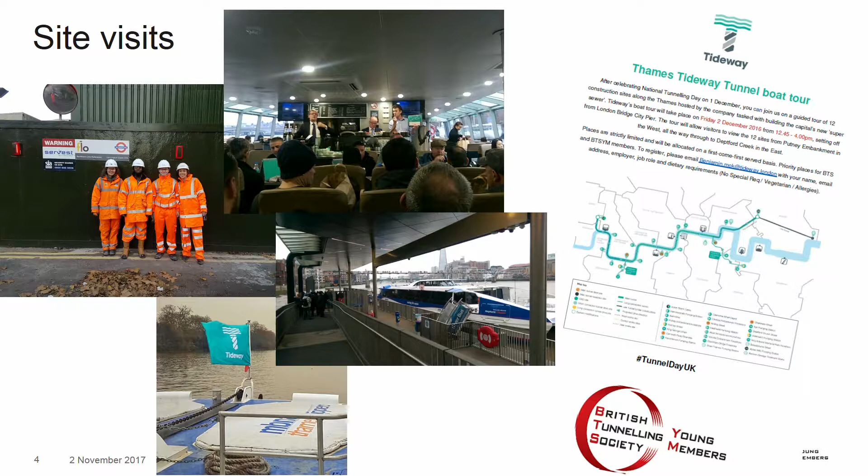And then in terms of site visits, we had 2 towards the end of last year, which was to the Northern Line extension, and we had the Tideway boat tour, so those were run as part of the National Tunnelling Day last year.

We also held our conference in March 2017, and it was popular as ever. We had close to 100 people attending, about 15 presentations by young engineers and professionals in the industry. We will be holding a conference again next year, and we're very keen to continue that run of giving young people within the industry the opportunity to talk about their projects and the work that they're doing with a like-minded group of people.

Schools and universities, one of our other subgroups, it's been a very busy year for them. We've completed the teachers pack and trialled it at 2 schools, so we did 2 lots of 12-week courses at the Oasis South Bank Academy. We ran our teachers pack, which is 5 lessons, as well as organising visits to the ICE and out to site visits as well.

That went down really well, and as a result, the pack's going to be available from next week on the BTS website, open to download from anyone that's interested. And the ICE are also currently developing their website, and there's going to be a new link to our teachers pack along with other resources that you can use for going out to schools and universities.

We also ran a TBM naming competition at the same school as part of National Tunnelling Day last year. That was part of a UKPN project in London, and the class also got to go out and see the TBM before it was launched.

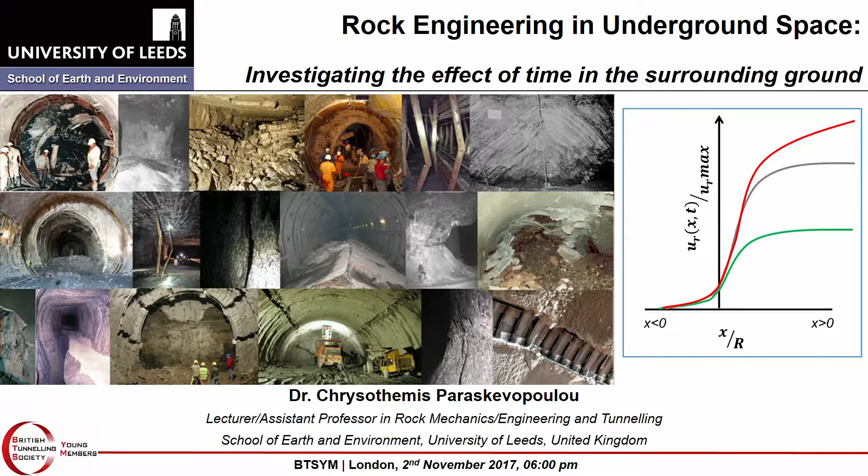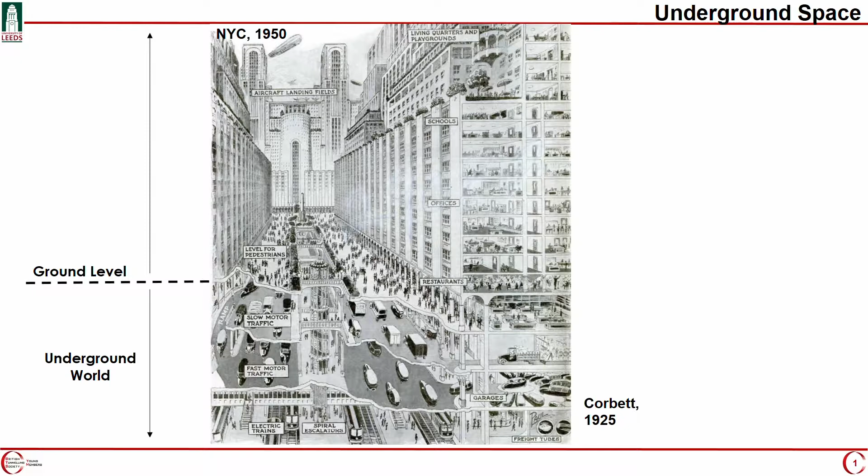When I give lectures and try to introduce the underground space, I really like using this sketch. It is a sketch by an architect, Corbett, in 1925, and he drew how New York City would look like in the 50s. You can see he's not that wrong if you look at the underground world and the above ground world.

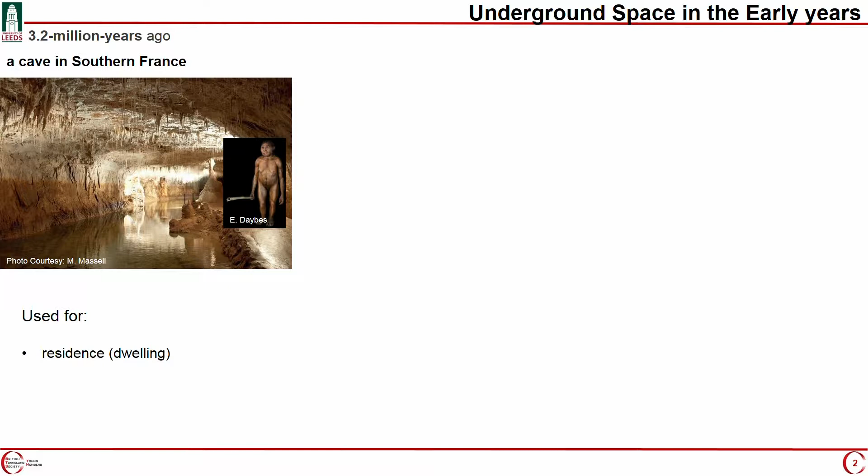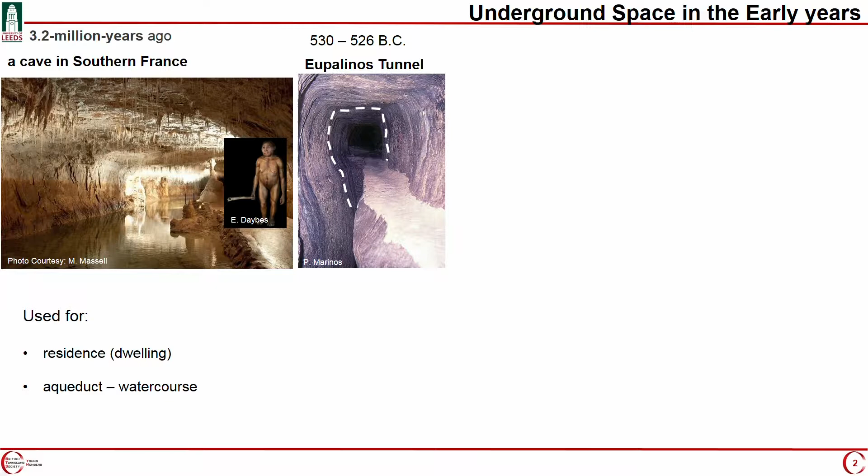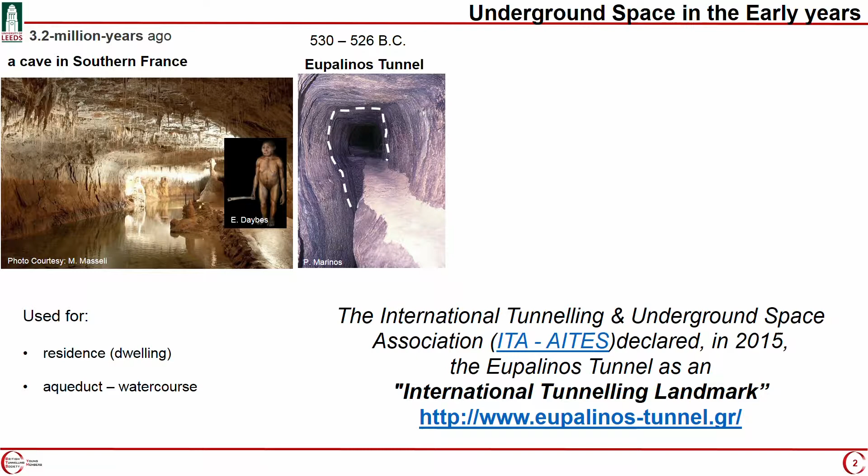Underground space has been used by human beings from the early years, almost 3.2 million years ago, where human beings used caves for their shelters. Here's another example of different usages of underground space worldwide. You can see this tunnel was used for a water course, the Eupalinos tunnel, which was recently declared by the ITA as the International Tunnelling Landmark, and it is one of the first reported tunnels in human history.

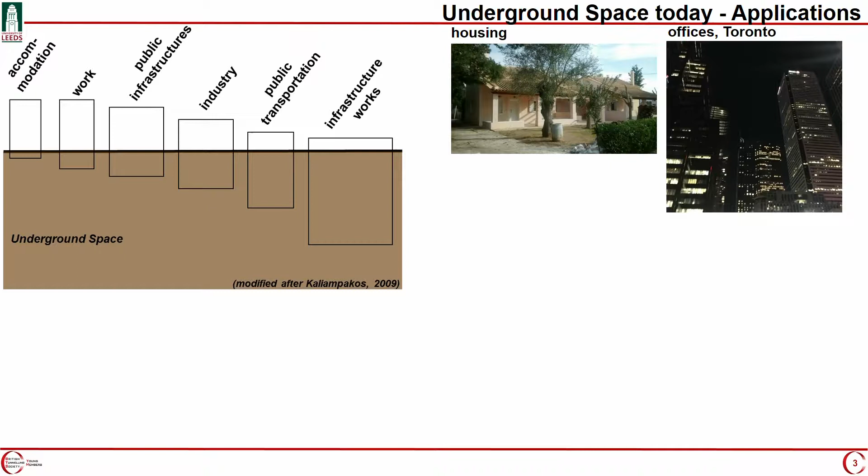Also, people used, even from 500 BC, underground space for creating rooms and spaces for water supply and storage. Here are examples of how we use underground space today - a little bit in housing, for offices to store files or other things. This is why these days the sky is not the limit, and we cannot build skyscrapers forever.

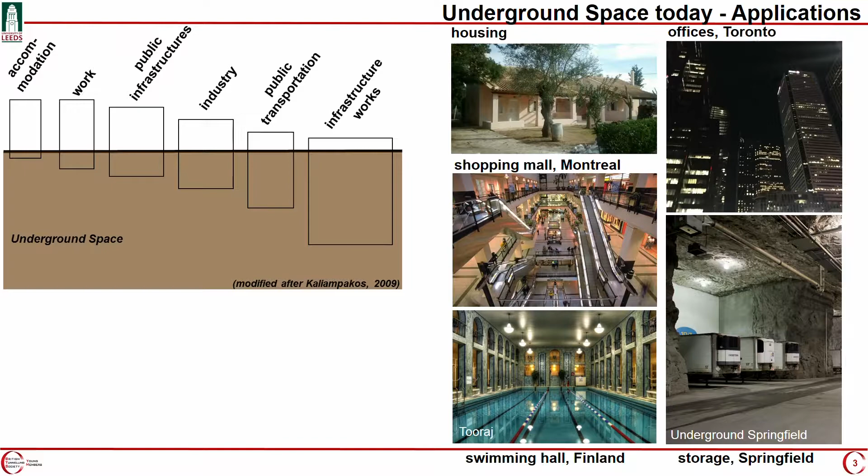We also use underground space for industry and public infrastructures, public transportation and infrastructure works. Here is why we do that and why we should use the underground space.

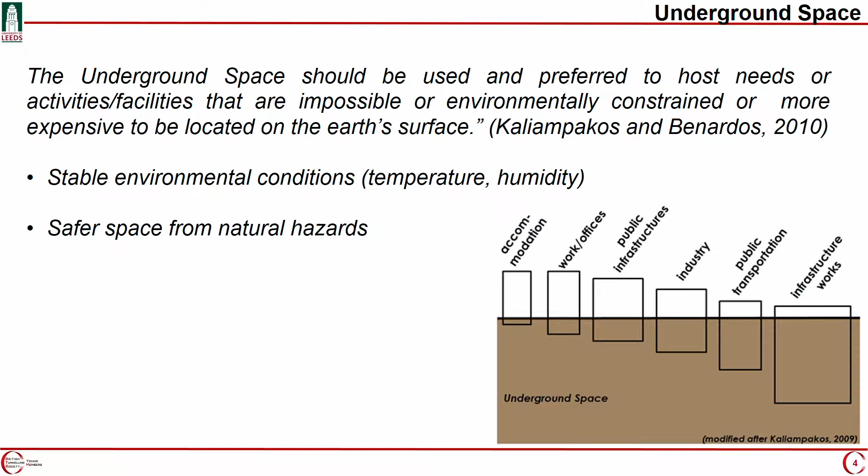We should use underground space and prefer it to host needs or activities and facilities that are impossible, environmentally constrained, or more expensive to locate on the Earth's surface. We do that for two reasons: underground space provides stable environmental conditions, temperature and humidity, and it's a safer space from natural hazards like earthquakes.

But more specifically, why should we go underground? Because we can use the surface in different ways. This is an example of the Musée du Louvre in Paris, where most of the museum is underground.

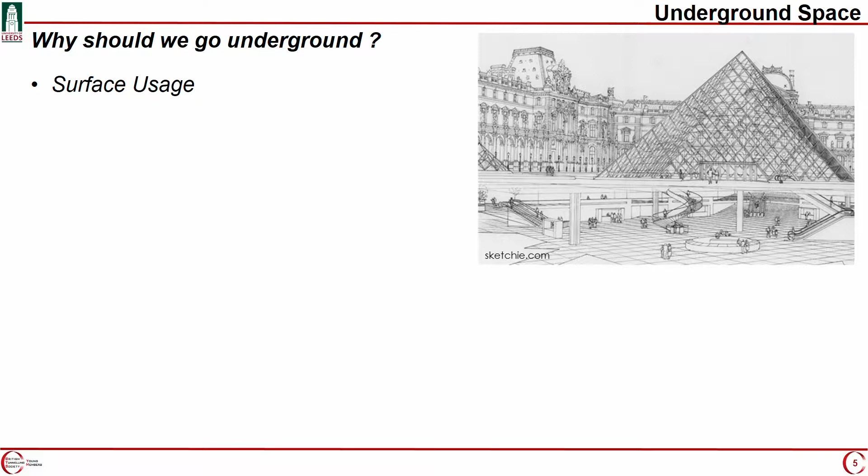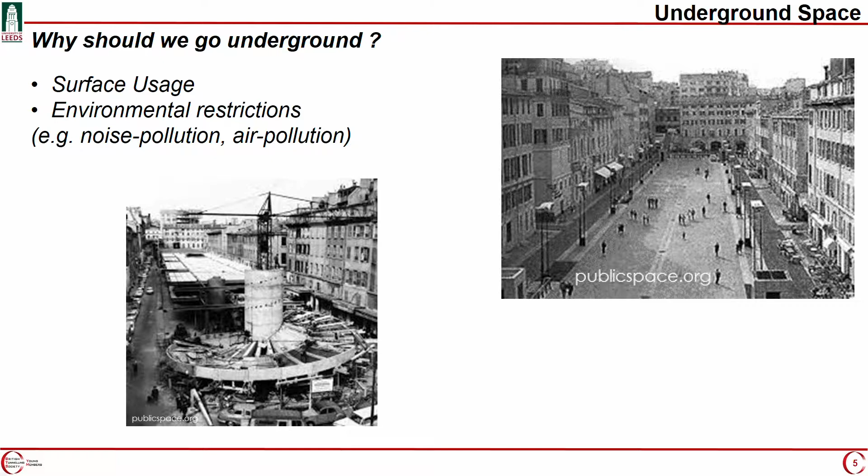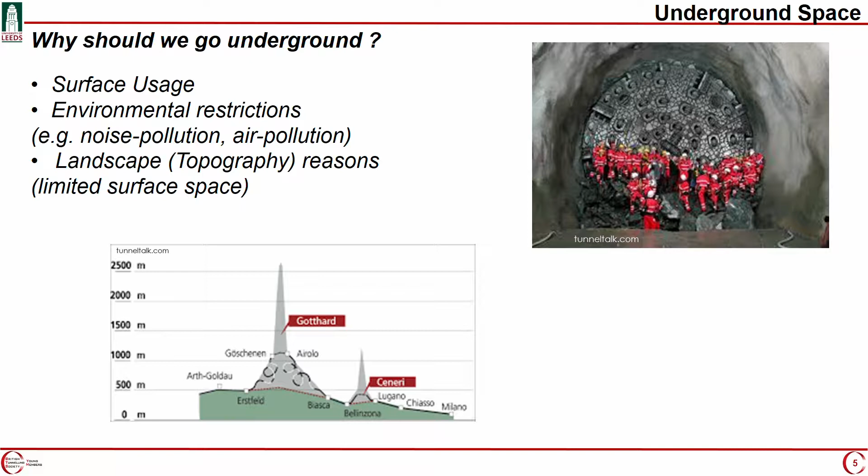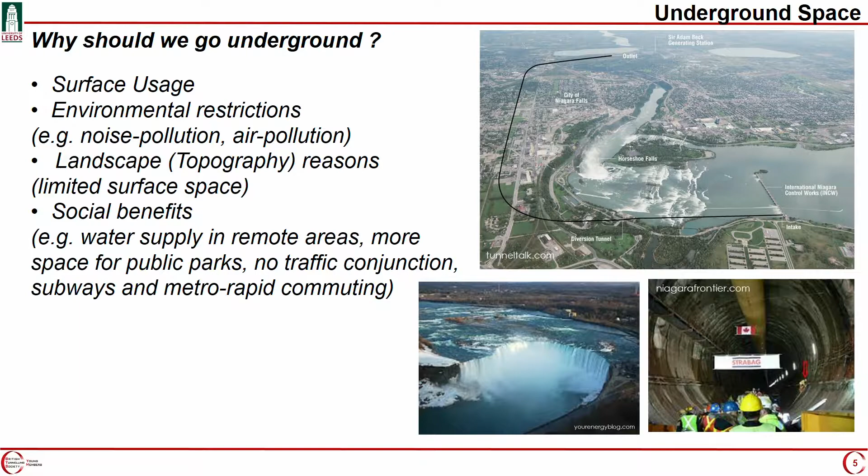Also, we have landscape and topography restrictions. This is the Gotthard Mountain and the base tunnel constructed and opened recently in 2016. And also for social benefits, we use underground space and build tunnels for water supply, public parks, and for limiting traffic congestion, subways and metros, etc.

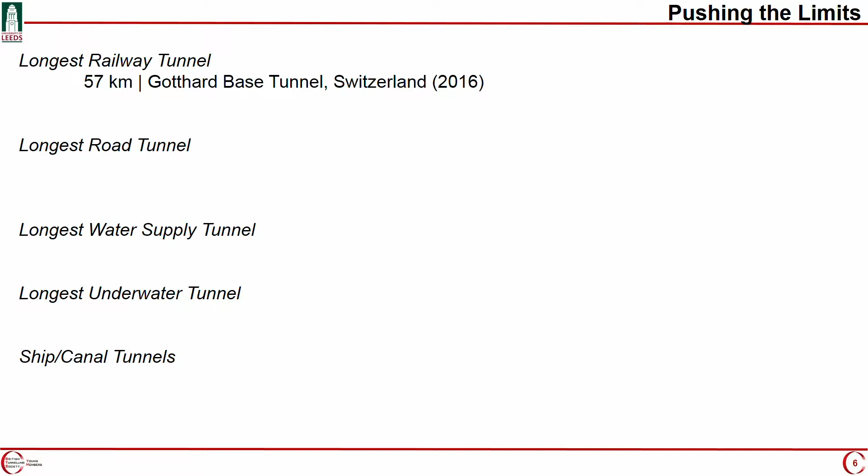But in our industry, we keep pushing the limits. So here are some examples of the longest different types of tunnels. The longest railway tunnel right now is the Gotthard Base Tunnel, 57 kilometers, constructed in Switzerland, opened in 2016. Here is the Gotthard Mountain.

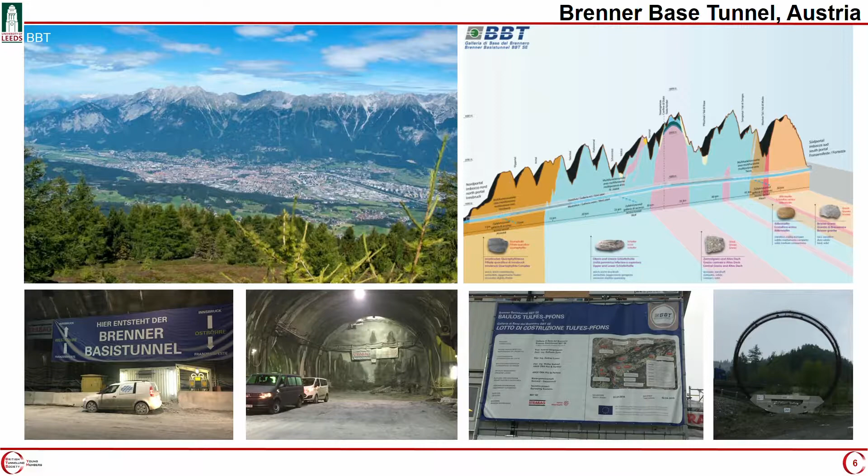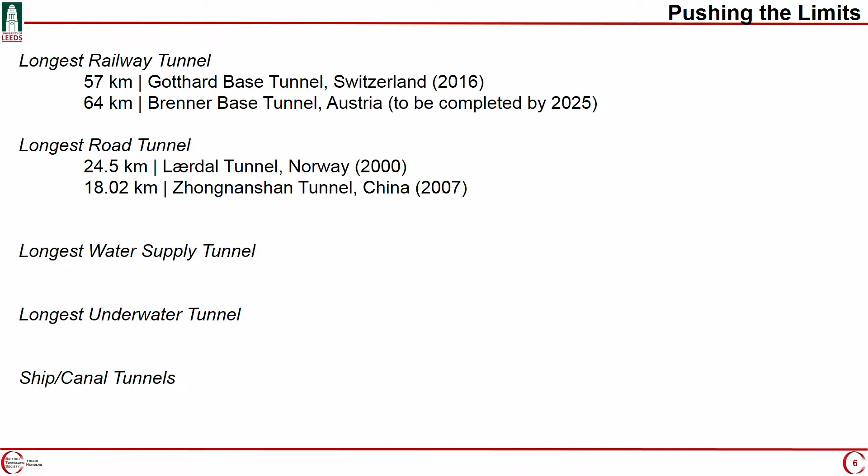The longest road tunnel is the Lærdal Tunnel in Norway, almost 25 kilometers. What's important here is that because the driver cannot keep his attention for more than half an hour or 20 minutes driving in there, they have different colored lights to keep the driver's attention.

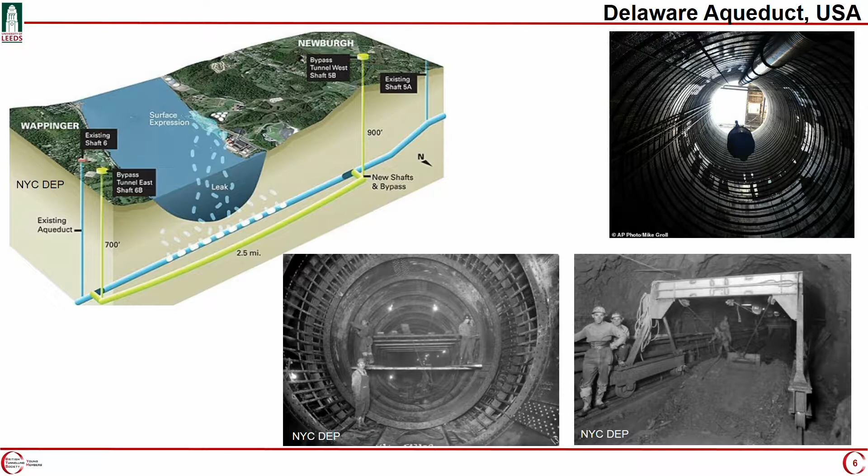The longest water supply tunnel is in the USA, in New York. It's almost 137 kilometers and was constructed in 1945. Because there is a leakage observed on this tunnel, now they're making a bypass.

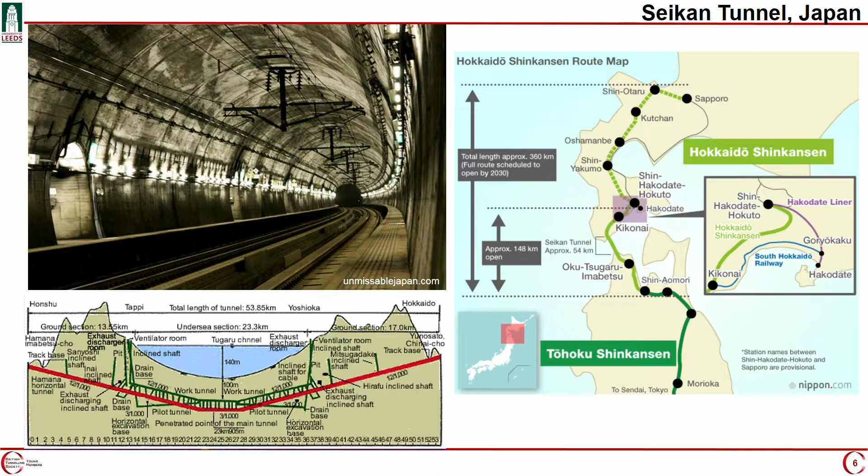And the longest underwater or undersea tunnel is the famous Seikan Tunnel in Japan, connecting the mainland of Japan with the island of Hokkaido. Here are some pictures of the tunnel.

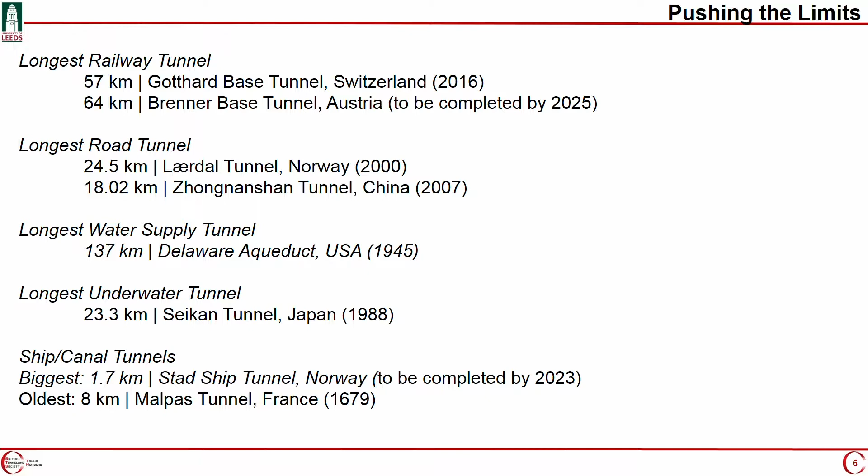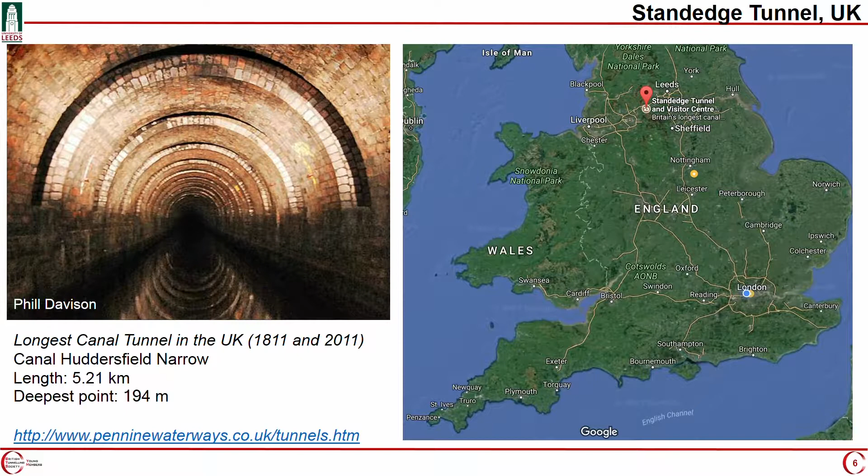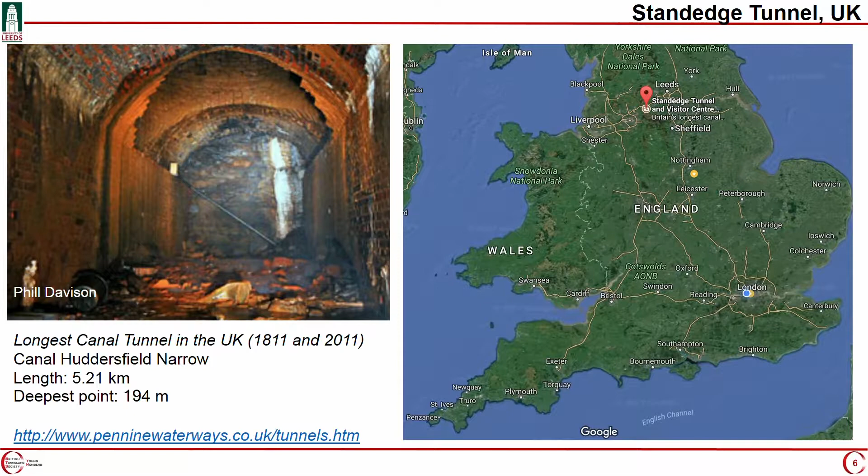But in the UK, as you may know, there are lots of canal tunnels, and the longest one, just for your information, is located between Sheffield and Leeds. It's called Standedge, and the length is almost 5 kilometers. The deepest point within the tunnel is 194 meters. It was constructed and opened in 1811, but was disused and abandoned by the 1940s, and is now reopened since 2011. If you have the chance, it would be nice to visit it.

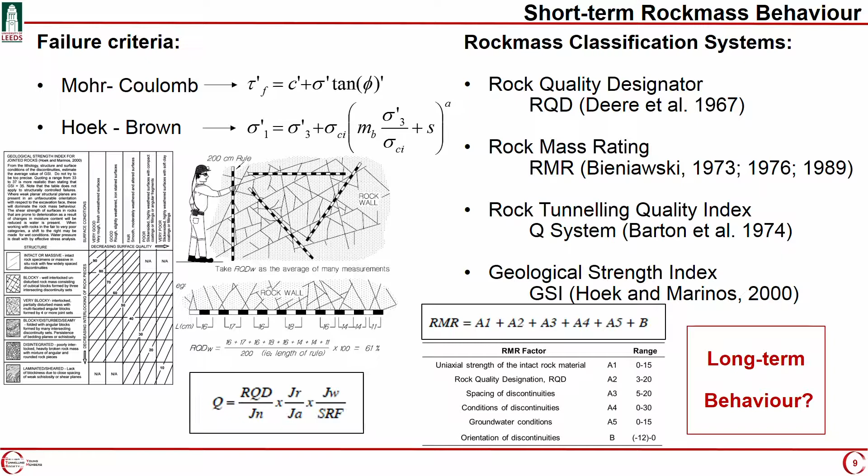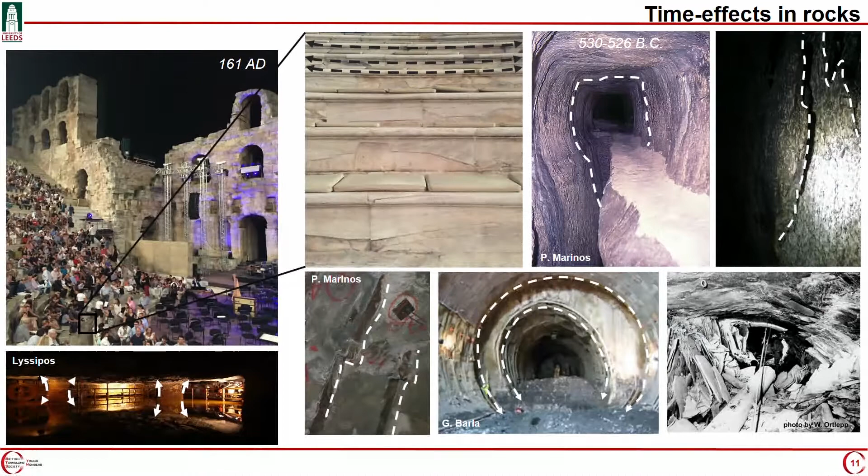So, time effects in rocks. I like using these pictures in my presentations because what I find remarkable is how these marble benches keep standing without failing after so many years.

Again, in the Eupalinos tunnel, it keeps standing, no support, after so many years. Other examples of this time-dependent deformation: you can observe the deformation on pillars on salt mines, or here, this is the famous Saint-Martin-la-Porte tunnel.

Or time can deteriorate the rock mass behavior and lead to sudden failure, mainly rock burst. So I will try to give you an introduction and a few information on time-dependent phenomena. I hope not to get you too tired.

The time-dependent phenomena can be either due to a change in state, stress, strain, or a change of property, Young's modulus, friction, Poisson's ratio, etc. And according to its reversibility, it can be either elastic, inelastic, or irreversible. The physical response can lead to creep, contraction, dilation, relaxation, or degradation.

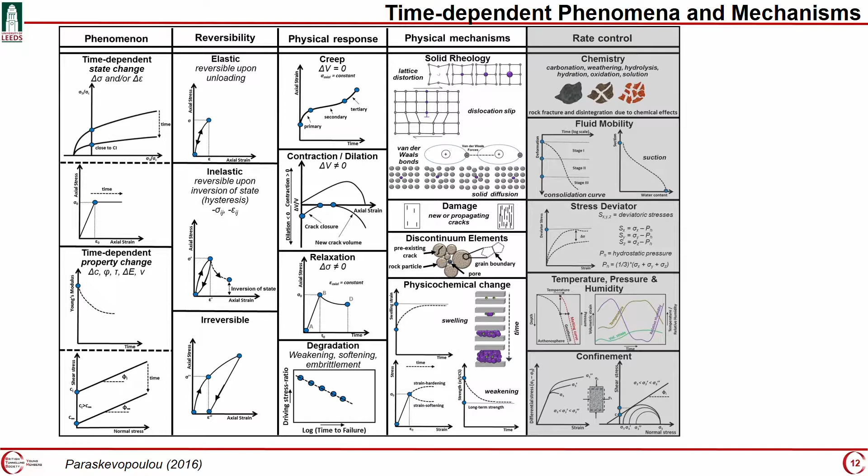The physical mechanism can be due to solid rheology, damage, discontinuum elements, or physical-chemical changes, while the rate can be controlled by chemistry, fluid mobility, stress deviator, temperature, pressure, humidity, as well as confinement.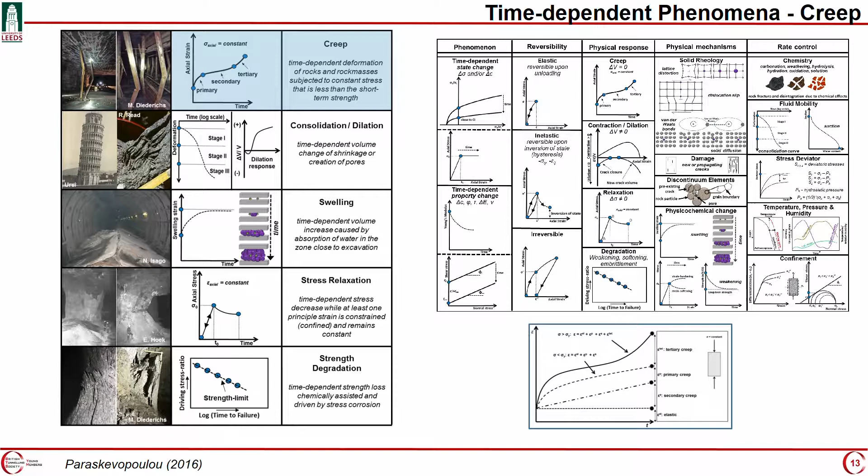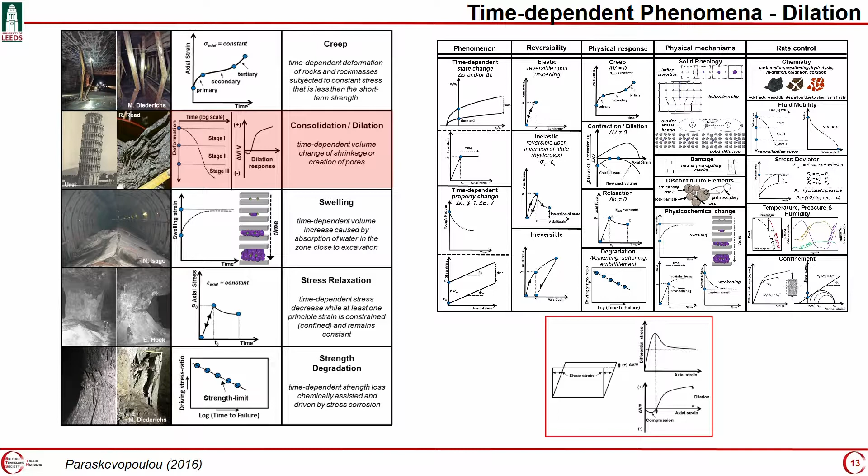Then we could have creep, which is the time-dependent deformation of rocks and rock masses subjected to constant stress that is less than its short-term strength. It can lead to consolidation or dilation, which is the time-dependent volume change of shrinkage or creation of pores. Swelling, which is the time-dependent volume increase caused by the absorption of water in the zone close to excavation.

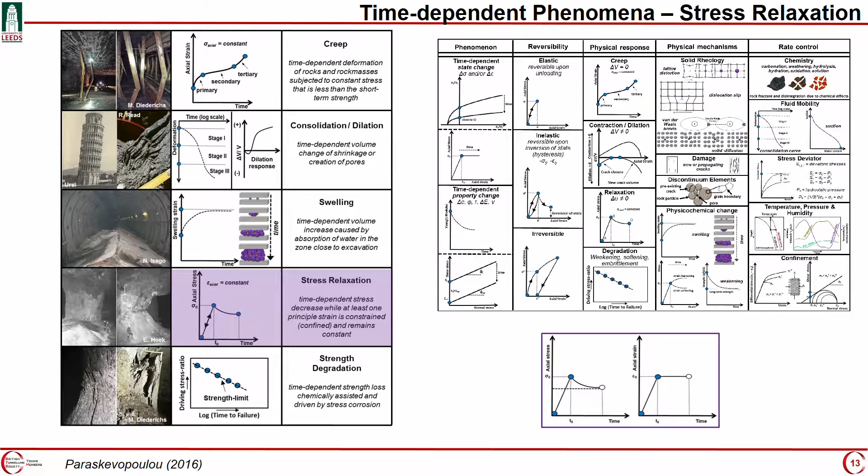Stress relaxation, which is time-dependent stress decrease where at least one of the strains is constrained or confined and remains constant, and strength degradation, which is the time-dependent strength loss that is usually chemically assisted and driven by stress corrosion.

In tunneling, we usually or often deal with squeezing, which is the time-dependent large inward closure of tunnels that can lead to complete shear failure, buckling failure, or shearing and sliding failure. But we can still have swelling or strength degradation, stress relaxation.

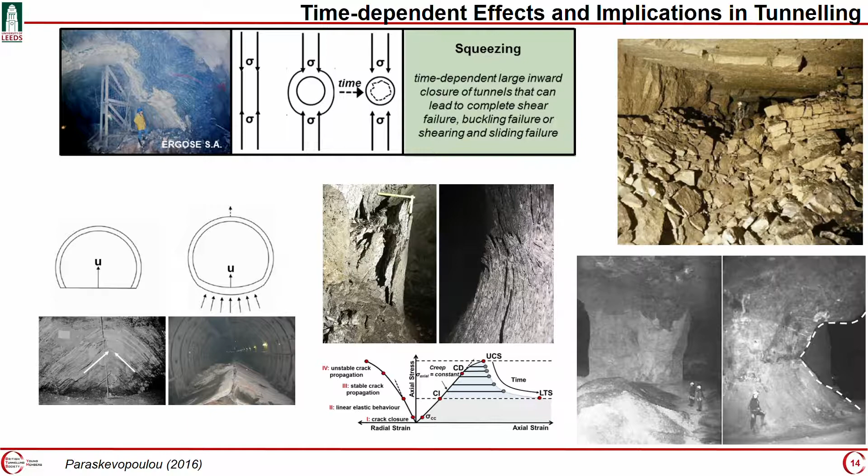What is important here to say is that all of these phenomena and mechanisms can act either simultaneously or individually. So the observed overall tunnel wall displacement can be a function of all of these, a result of all of these different phenomena.

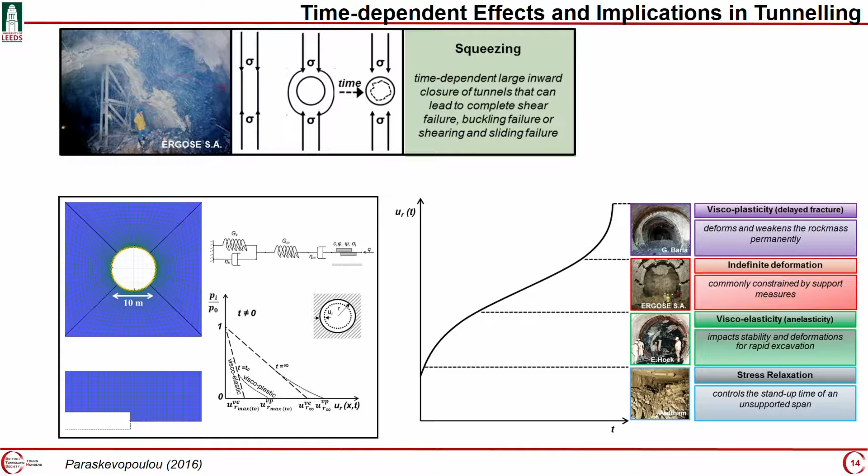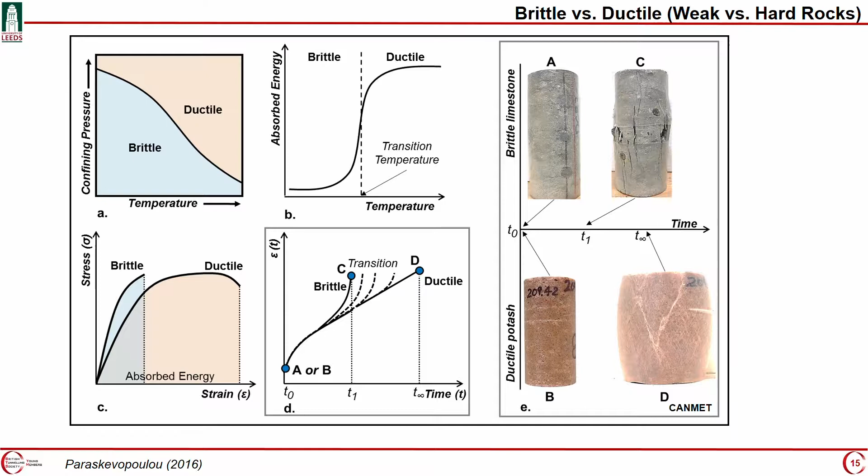Depending on the confining pressure and the temperature at which a material has been formed, it can behave as either brittle or ductile. This is important when we're dealing with time dependency, because potash, for example, with time can keep deforming. However, a more brittle material, for example limestone, will fail in a sudden manner.

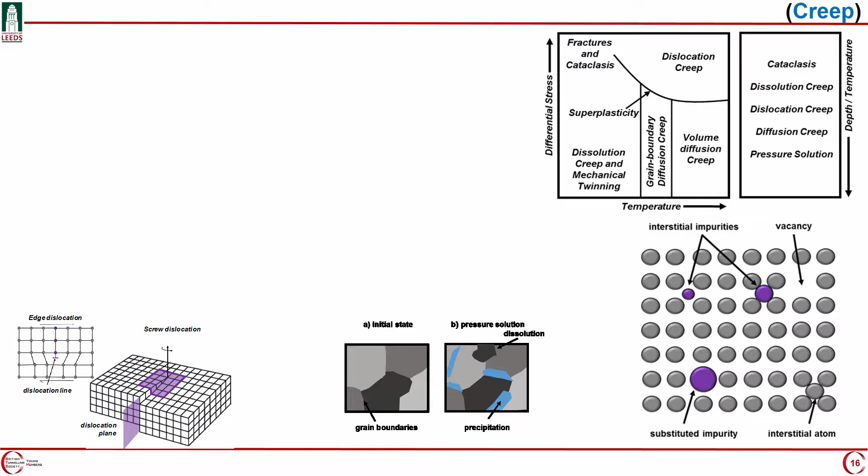Not always are all three stages distinct though. At the beginning we have the elastic response, and then as the load or stress is kept constant, we have increased deformation, displacement or strain. So we have the primary stage of creep, and then the rate of deformation changes and becomes constant - we have the secondary stage of creep - and then at some point we have the accelerating, tertiary creep where failure might occur.

All of these time-dependent phenomena can be simulated with time-dependent models. Usually we use empirical formulations, basically formulations based on experimental data and curve fitting, and general theories that are mainly based on the overstress theory of Perzyna, which other researchers have expanded and extended. For example, Debernardi has created another constitutive model to describe this time-dependent behavior of specific rock masses.

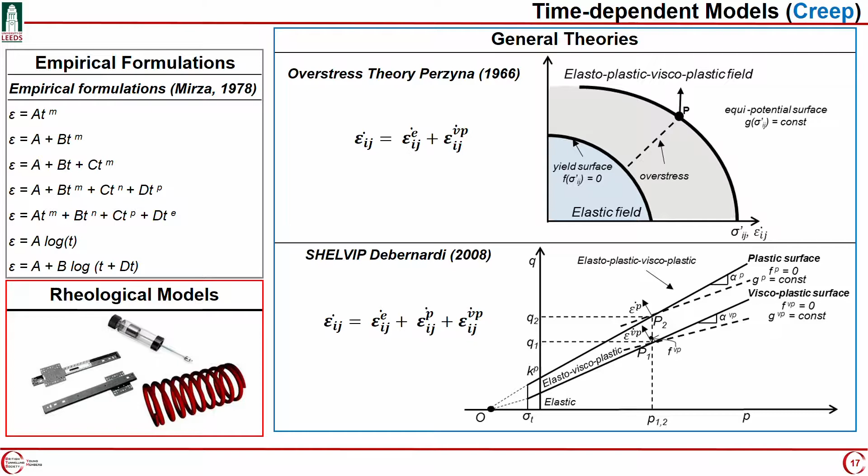And we have rheological models, and I will focus on those. Some of you who do modeling for your job might have seen these things. You might have tried to neglect them, but I will just give you an overview to understand how these things work.

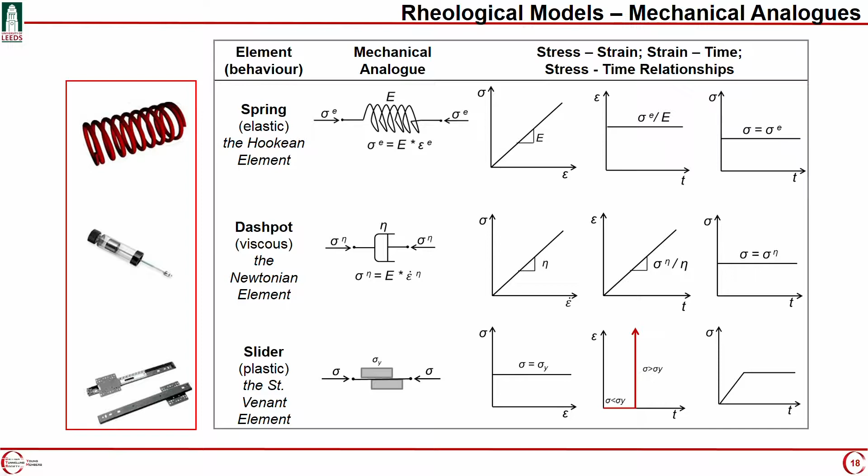Rheological models are basically mechanical analogs that consist of springs to simulate elastic behavior, dashpots to simulate this time dependency, viscous behavior, flow - keep in mind that dashpot means flow, either slow or fast - and sliders, which we use for plastic behavior. So if we arrange these mechanical analogs in different ways, we can simulate different behaviors.

I'm going to focus on viscous models, and I will give you a brief overview of the viscoelastic models that we use for time dependency and mainly in creep.

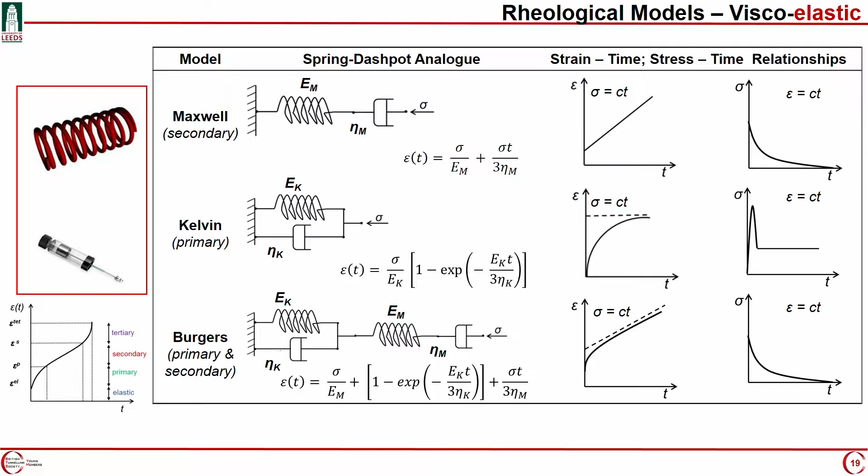If we put the spring and the dashpot together in series, we have the Maxwell model, giving us this part of the curve, the secondary stage. If we put it in parallel, we have the Kelvin model, giving us the primary stage of creep. And if we put those two, Kelvin and Maxwell, in series, we have the Burgers model, which can only simulate the primary and secondary stages of creep.

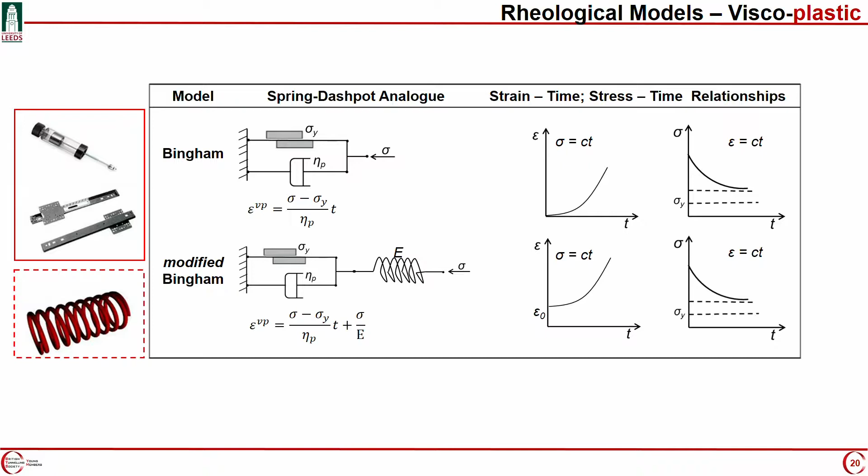When we talk about viscoplastic models, we always need the slider - remember, plastic is a slider. So again, with different arrangements, we can simulate different behaviors.

I will focus on this model that I will be using later in a numerical analysis. I will just briefly give you a description. So we have the CVisc model, which is actually a viscoelastic-plastic model.

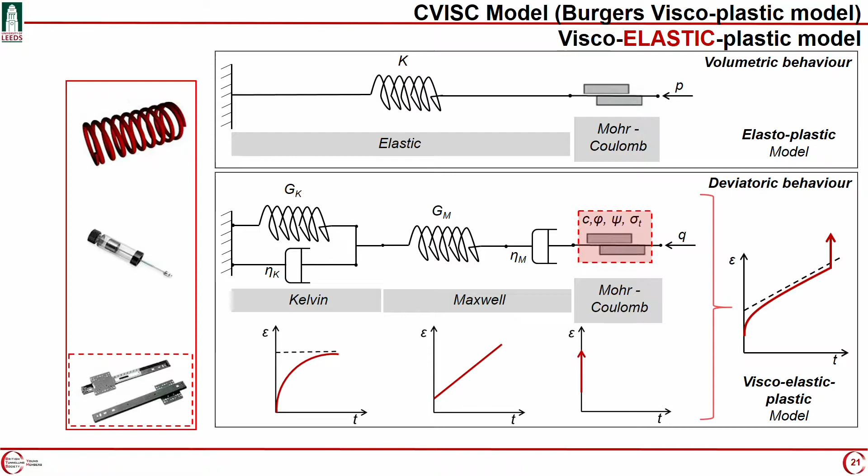And it is a Burgers model, as you may see, with a slider in series to simulate the plastic behavior at the end. And in order to use all these models, we need parameters. And how do we get parameters?

From laboratory testing. So from a UCS baseline testing, and this is a typical stress-strain curve, we get design parameters. So I'll just go through with that very quickly.

At the beginning, when we load the sample, we have the crack closure, the pre-existing cracks closing. As we increase the load, we have the linear elastic behavior until the first crack initiates. And we have this CI threshold, crack initiation threshold.

As we increase the load further, more cracks start to grow and propagate. And as they interact with one another, they have a stable crack propagation until the crack damage threshold, where after this, we have the unstable crack propagation that can lead our sample to failure.

But this is how we can get time-dependent parameters, by changing our boundary conditions. And remember that we need to have a load or a stress that is less than the short-term strength. So we should be on this part of the graph, not closer to the UCS.

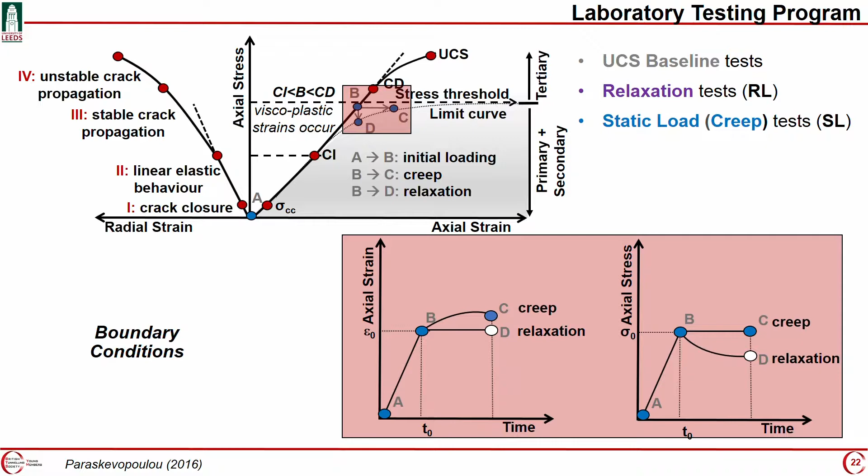And we can have relaxation tests or static load tests. So by either keeping the stress constant, we have creep test, or the deformation constant, we have the relaxation test. So loading until a desirable stress level lower than the short-term strength, and holding the deformation or the strain constant.

Then we can observe the stress, how the stress relaxes. And this is something that we observe usually on tunnel faces as we excavate it, or whenever we create an opening in the underground space, you get stress relaxation. So that's the idea behind it.

And here we have the creep or the static load test. So we load the sample until a certain stress threshold, and then we keep the stress constant, and we see how the strains behave.

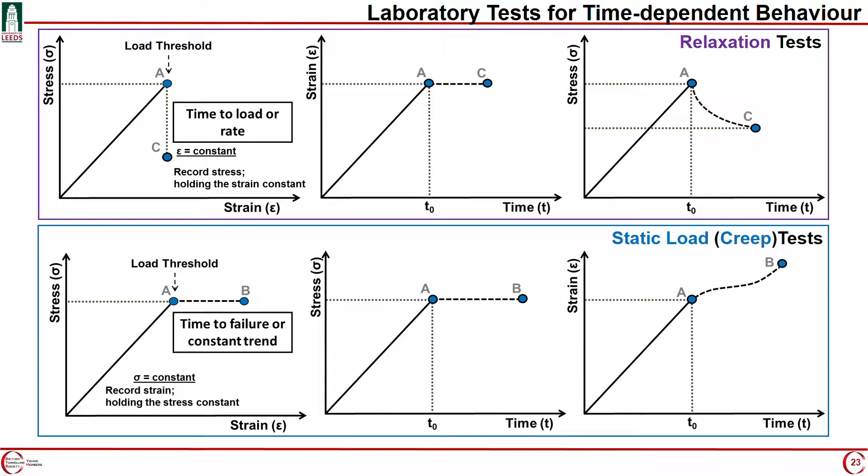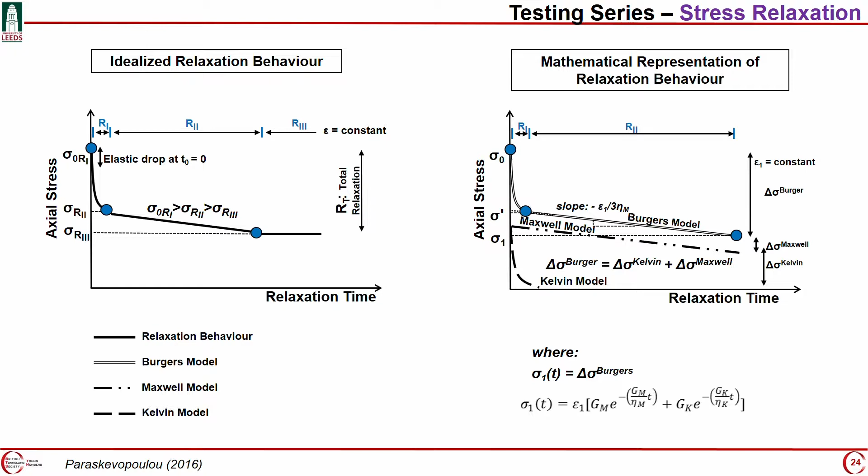In a relaxation behavior, we do have three stages as well, and by fitting our experimental data to an idealized relaxation behavior, you can get the viscoelastic parameters.

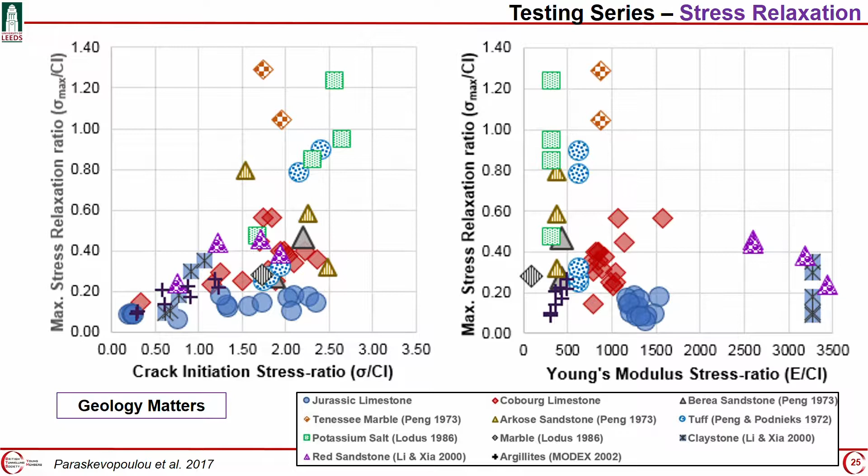I'm just showing you this, but I want to state that there are relaxation tests out there, and there are parameters. So if you dig a little bit in the literature, you can find this easily.

Similar to creep, the only drawback with creep is that you need time to have a creep test, and a relaxation test usually has a faster duration than the creep test. For example, in a brittle material like limestone, you can have a relaxation test within 1 to 2 days. A creep test can last even a year.

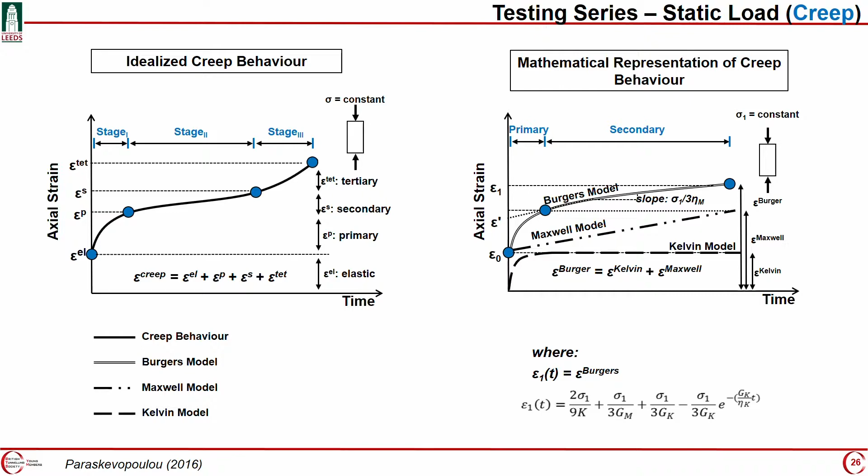That's something else to keep in mind. So here, just one of the results I was doing in my PhD. I was curve fitting. This is real data from a creep test on limestone, and I was curve fitting and finding these parameters.

Something else to keep in mind: creep tests might last longer, but they're good when we're dealing with strength degradation and how the strength decays over time. That can give us an indication of the long-term strength of the rock.

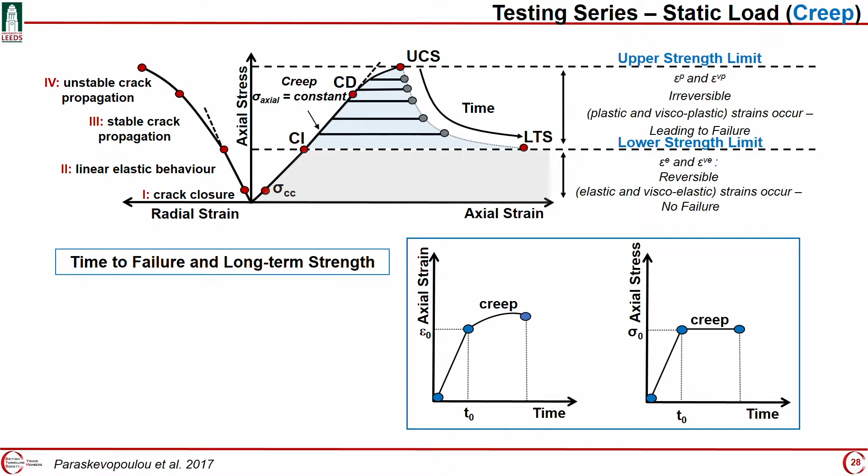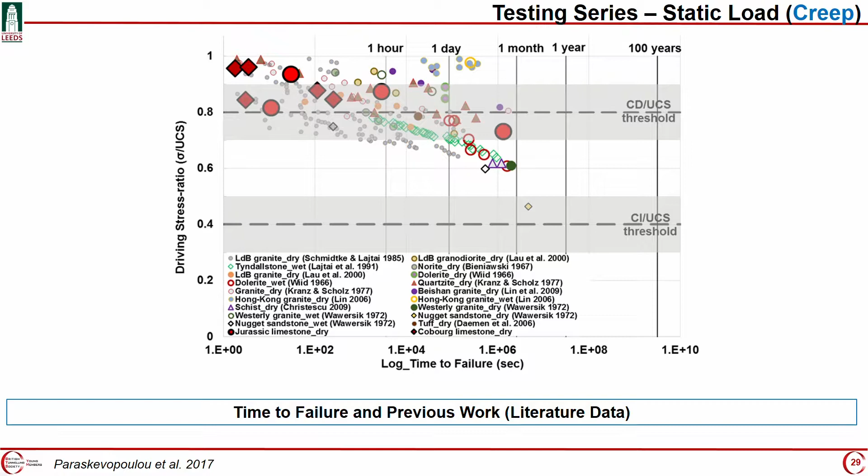So again, this is another data set I put together with many different rock types on long-term strength. For example, we have two different rock types, limestone and granite, and even though granite is usually stronger if it is not weathered than limestone, in the long run, the limestone is stronger than the granite, as you can see here. Think of it as normalized stress versus time to failure.

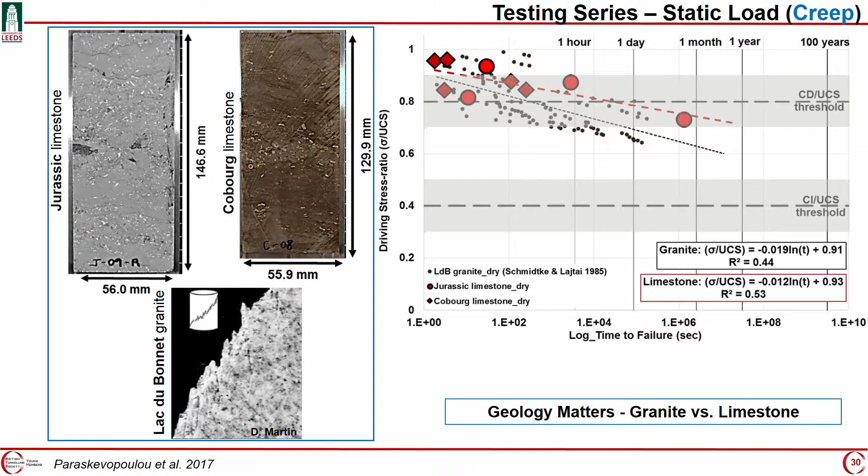And because of the heterogeneity of the granite and the different mineralogy and the different rates that the minerals flow in granite, they can make the granite fail and not be able to sustain as much strength as the limestone, which is more homogeneous. So I'm just trying to trigger your mind when you're dealing with different rock types.

So this is an overview of the long-term strength. We have the driving stress ratio here, time. All these dots, the filled ones, are samples that have failed. The open circles and shapes are samples that haven't failed yet.

So when we're dealing with brittle materials, we expect failure to occur within an hour when we load it in this threshold above crack damage threshold, when we have this unstable crack growth, if you remember, and below CI, where we have the elastic region and crack closure, we are not expecting damage.

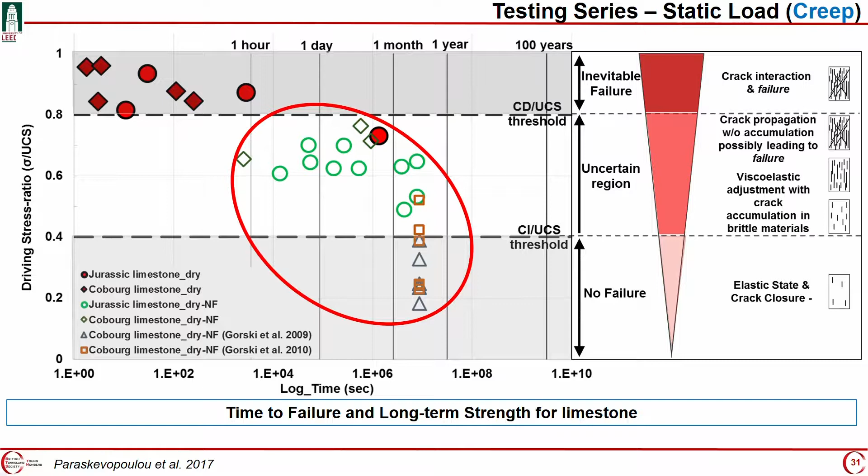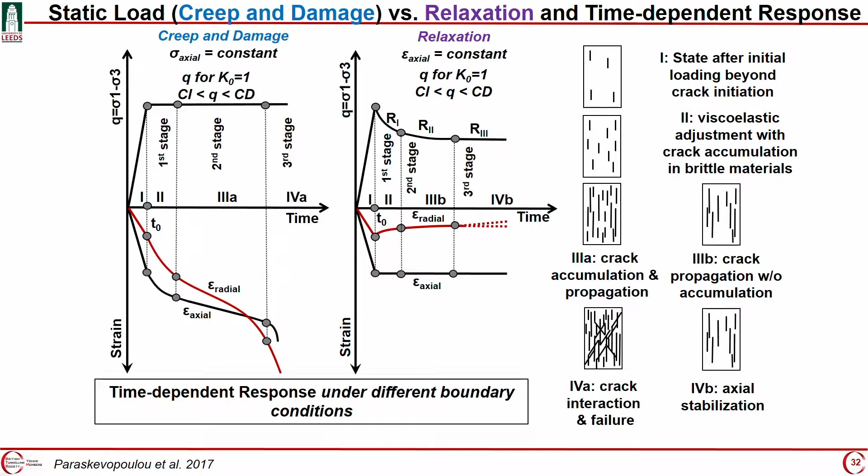All of these points, you should think of them as moving points because they're going to fail later on over time. Just an overview of these two types of time-dependent phenomena: creep and relaxation. They both can be described by three stages, and similar responses can happen depending on the load on the rocks as the load and stresses change over time.

So, we have figured out a way to find our parameters. Now what do we do with these parameters? I'm going to give you an example of a numerical analysis I did using this time-dependent behavior in a tunneling environment. Before I do that, I'd like to say a few words about convergence and the convergence-confinement method and characteristic lines, and how using this method we would approach time-dependent behavior in a tunneling environment.

Convergence is usually defined as the inward tunnel wall displacement, and this can be a function both of the tunnel advancement and the time-dependent behavior. So it's a function of both the location of our face and time.

We use this approach also with the ground reaction curve, which shows the decrease of the internal pressure PI. Most of you might have seen this before. If we assume that this is a tunnel and this is our face, our internal pressure in front of the face equals the stress, the in-situ stresses, correct? And then as we progress in the tunnel, this PI starts to decrease.

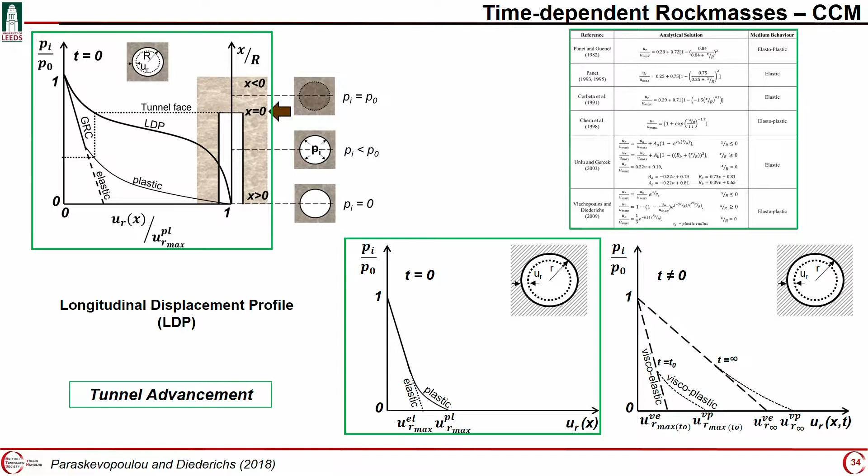There are many formulations and analytical solutions for these LDPs, or how to calculate LDPs, depending on the material behavior, whether it's elastic or elastoplastic. But they neglect to account for time.

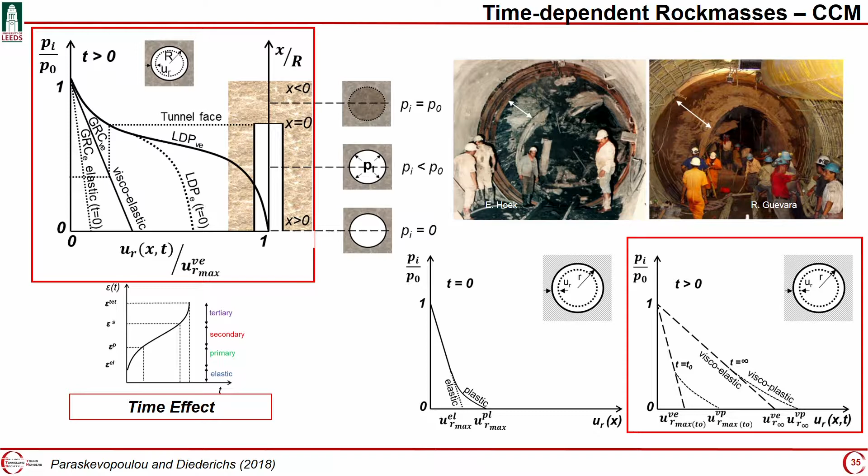So if you don't account for time, you might end up with these unfortunate situations. This is from the Yacambu tunnel, and you can see the remaining parts of the TBM. It had to be abandoned. In this case, they underestimated the total displacement, so they got their TBM trapped.

There are, however, analytical solutions for these time-dependent models that I was explaining to you before in a tunneling environment, referring to circular tunnels, the simplest geometry. However, they don't account for tunnel advancement. So either you have one or the other.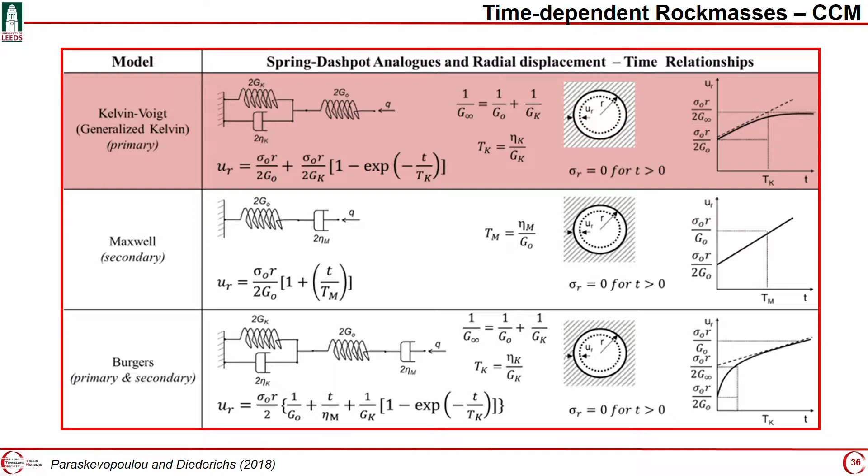I will be focusing on the Kelvin-Voigt, the primary stage of creep, where after a while the displacement or the strains stabilize and reach an asymptote.

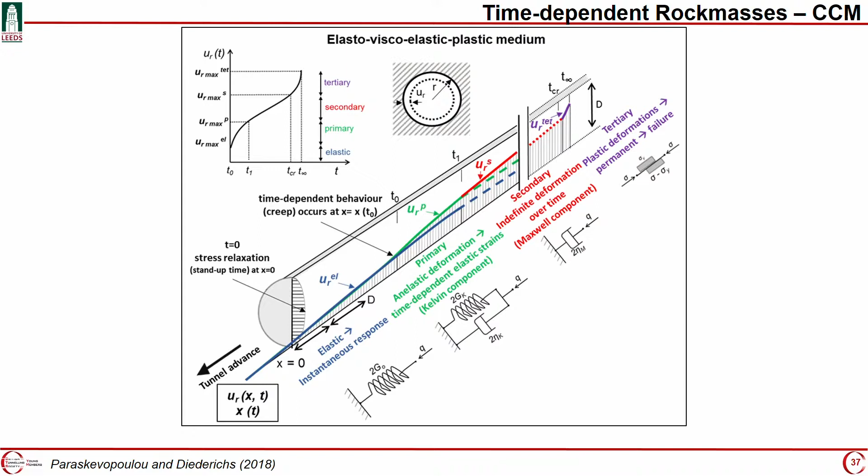I put this figure together so I can put all this information together, but let's take a step backwards. Imagine that this is our tunnel, and our material, our rock mass around it, is elastic. As we know, it will reach the maximum tunnel wall displacement after 2, 3, 5 diameters away from the face, depending on the material, right?

But if this is not the case, what if we have time-dependent behavior or potential? So even this primary stage may need more time for our total displacement to take place. This means we need more diameters away from the face, maybe 5, more than 5, 8.

But what if they don't stabilize? What if the rate changes? Then we have the secondary stage of creep here, then we have the Maxwell component in our model, right? And if they keep going, we are okay. But if they keep going with a constant rate, we have the secondary stage of creep.

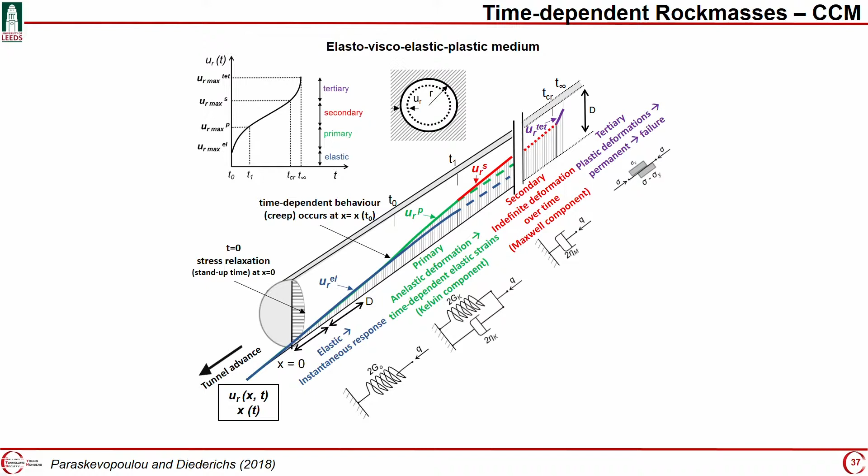But if there is one of these at its critical time, there is another accelerating stage where failure will occur. Then all of this medium would behave as elasto-viscoplastic. But in the analysis I'll be showing you, I have neglected this tertiary stage of creep. I am only showing you the elasto-viscoelastic medium, so no failure.

Just keep going, and imagine this like a tunnel that will keep deforming until closure takes place.

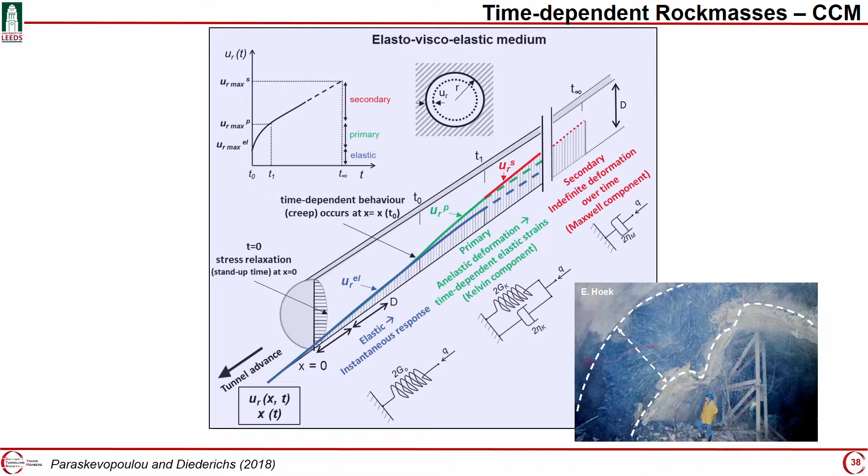So I will give you an example of a numerical analysis, a parametric analysis I did with FLAC, Itasca software. I analyzed two cases, drill and blast. You can see here the jumbo and the TBM. The only difference between those two is the excavation, the length of the tunnel advancement, since my only separation was between those two methods. Drill and blast, 3 meters usually, and 1 meter for TBM.

I created this rock mass material as a viscoelastic material. I increased the cohesion and the tension so it became elastic, and I used that CVisc model I showed you before. I analyzed two sets of parameters, two different sets of viscoelastic parameters.

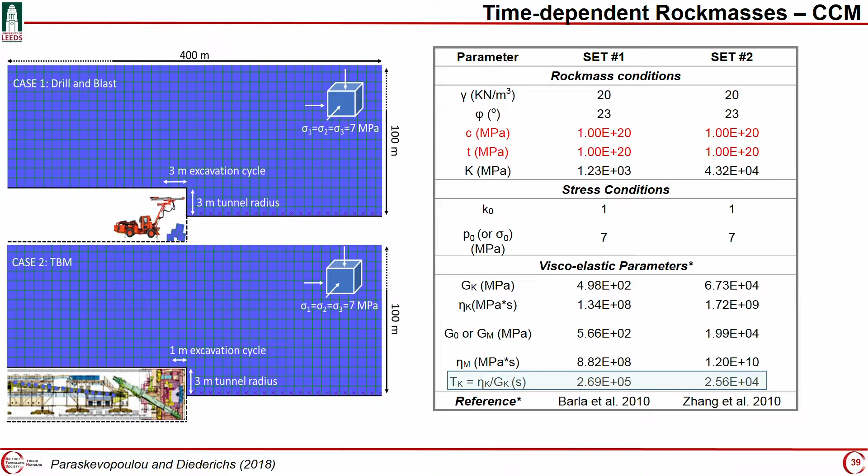The main difference was that this set of parameters had a difference of an order of magnitude in this parameter, called the retardation time. I will show you through the results what this does. But before I started my analysis, I wanted to compare my analytical solutions with numerical results.

So I used the elastic and the Hoek-Brown and Duncan-Fama elastic solutions, made it elastic, and the Kelvin-Voigt numerically, and the Kelvin-Voigt of Panet's equation. The results are pretty good. Here is displacement, and this is distance from the face. All of these views are closer views of these rectangles. You will see many figures like that from now on. These are the LDPs we were talking about before.

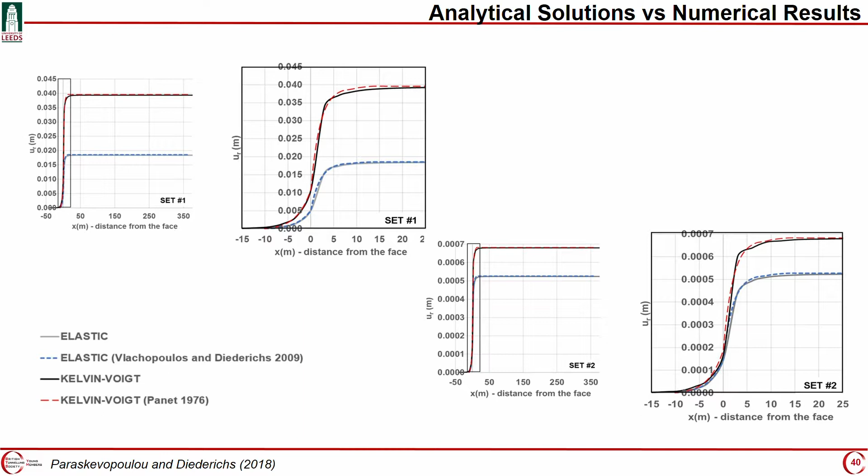So for a drill and blast case, up we have one set of parameters, down we have the other set of parameters. Again, closer views, and all of our results are normalized now, so we will have a reference.

So my boundaries are the elastic limit and the Kelvin-Voigt. This is an LDP assuming that I excavate the tunnel at once, and then I let the creep do its own thing. I didn't take into consideration the tunnel advancement, like how much I progress every 3 or 1 meter. The colorful lines here have encountered the duration of this tunnel advancement.

They refer to numbers 2 to 8, and they refer to hours. So this is if my whole tunnel excavation and support, this tunnel cycle, the duration was 2 hours, 4 hours, 6 hours, 8 hours.

The two sets of parameters with this retardation parameter, one order of difference, it can be seen here. So what this tells us is that the lower the retardation time, or this ratio of parameters, the sooner it converges to our total deformation or displacement, the tunnel wall displacement, than the other set of parameters.

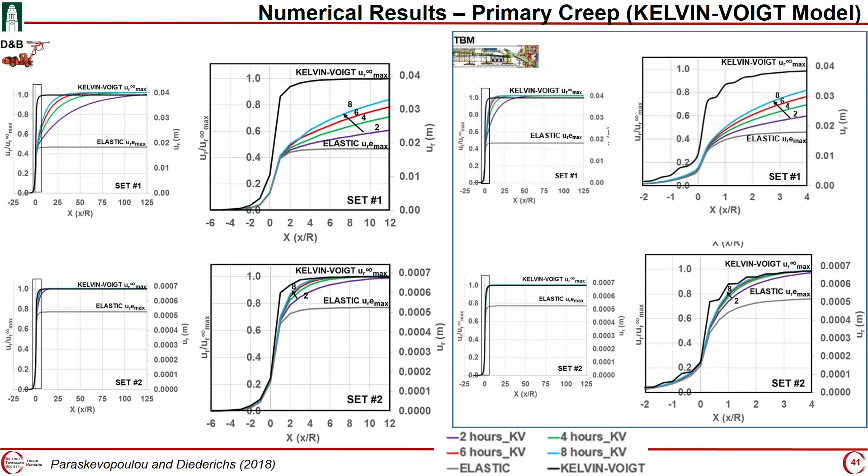So at the end, you get your maximum tunnel wall displacement closer to the face, but in a longer period of time, if you understand my thinking. On another set of models, I encountered the secondary stage of creep as well, so the tunnel will keep deforming until total closure takes place. So drill and blast, and again, TBM.

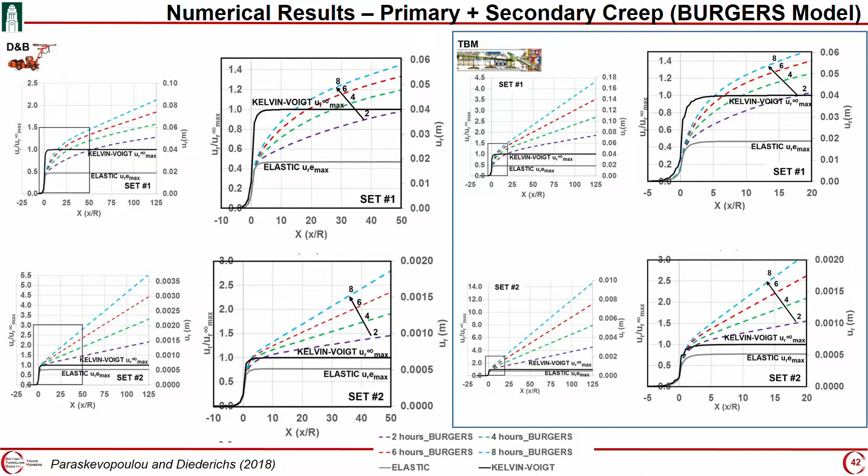The question, however, was in my models, when does creep start? You can see it on both cases, drill and blast and TBM. It starts after one diameter after the face in the excavated space. You can see that the elastic, with the gray line LDP, and the time-dependent viscous ones deviate from elasticity after this distance.

So this is normalized, but it is one excavation diameter after the face.

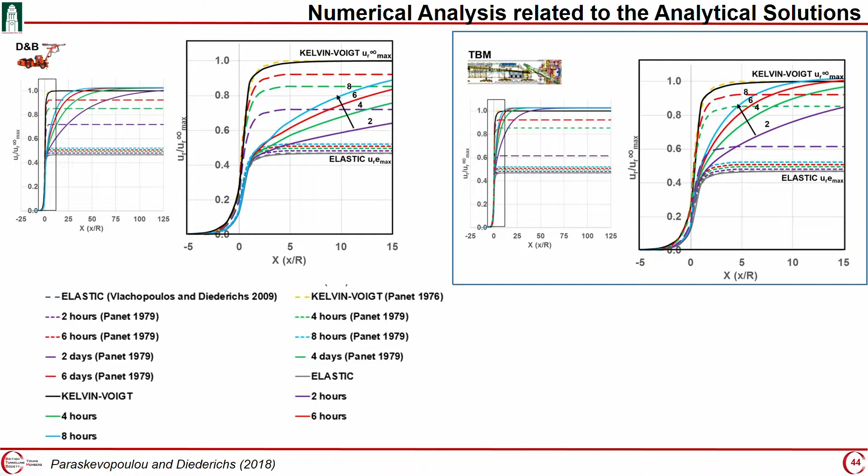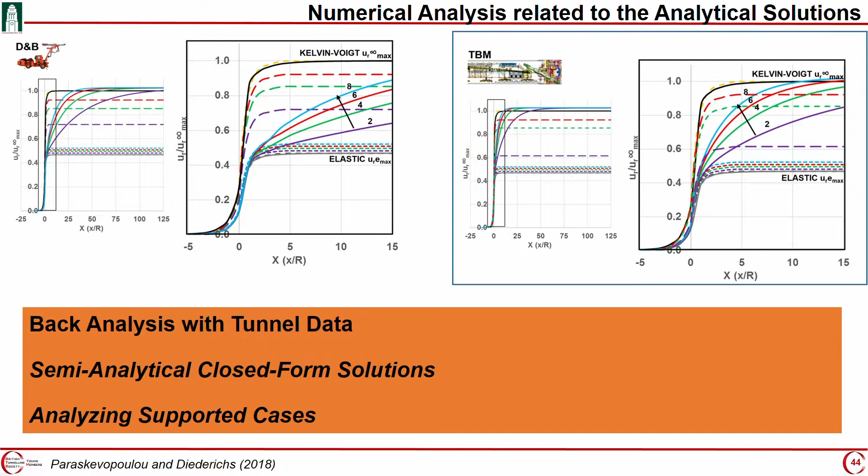So right now I'm working on back-analyzing this with real tunnel data to produce semi-analytical closed-form solutions you can use for both, that encounter both effects, and analyzing supported cases. So I hope I didn't bore you with all of this, but I would like to leave you with these three conclusions.

They're focusing on the analysis. The utilization of conventional methods used to predict the longitudinal displacement profile of the radial displacement have limited application and fail to capture the overall displacement over time.

The excavation method also controls the overall displacement. Different results may assist the selection of utilizing drill and blast over TBM excavation if it is proven financially affordable. Being able to predict and estimate the rock mass response due to one excavation method versus another can lead to project optimization.

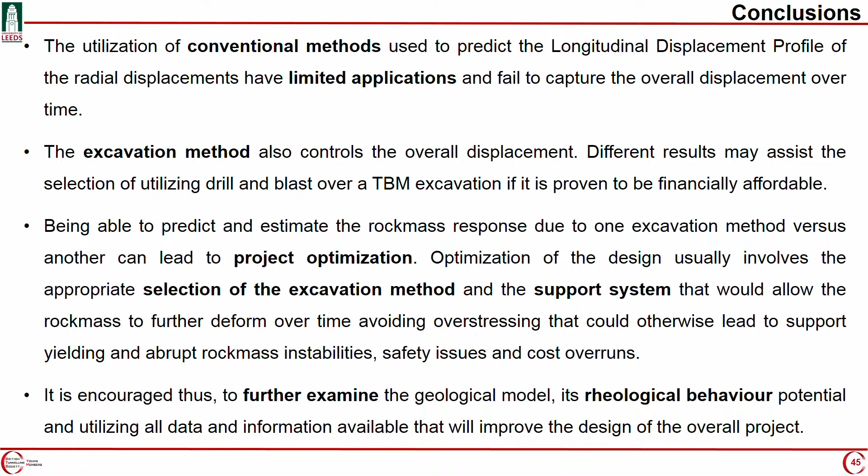Optimization of the design usually involves the appropriate selection of the excavation method and support system that would allow the rock mass to further deform over time, avoiding overstressing that could otherwise lead to support yielding and abrupt rock mass instability, safety issues, and of course cost overruns and project delivery delays. It is encouraged to further examine the geological model, the rheological behavior, potential, and utilize all data and information available that will improve the design of the overall project.

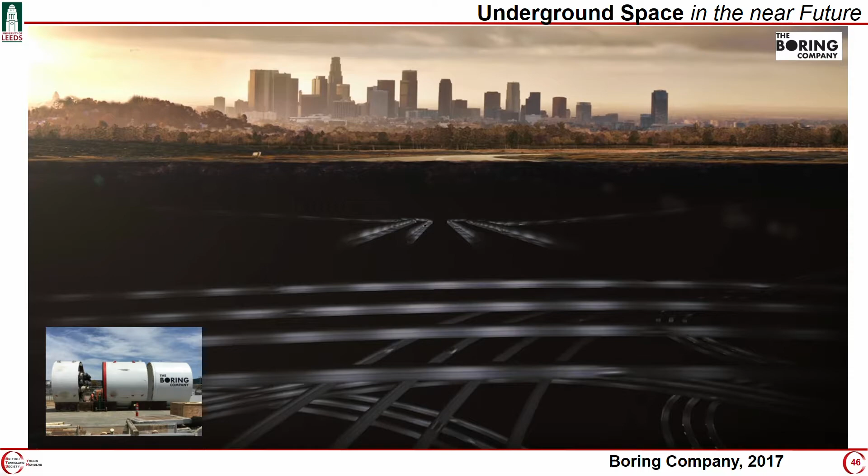And I will leave you with this, another visionary entrepreneur. I found this image online a few days ago, and this is how they're thinking the future of underground space will be. So with this, I would like to thank you.